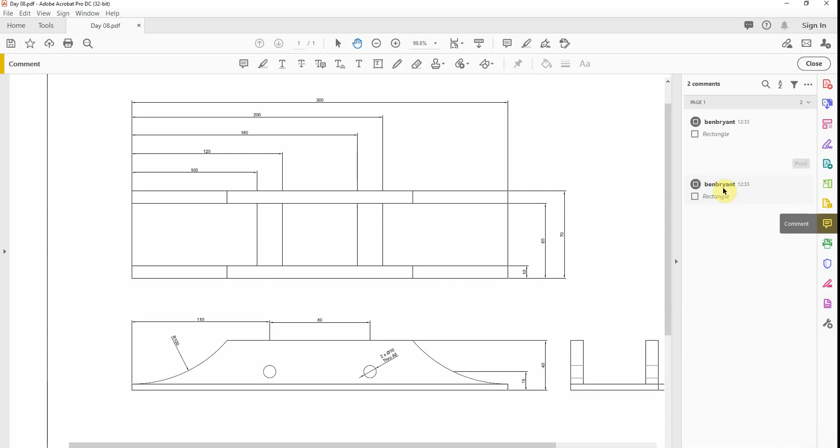So if you watched the earlier video, you know I've split this into 3 parts. This part is the top view, this part here is the frontal view, and the last part on the right is the right hand side view.

So how would you start something like this in AutoCAD? Well, it's the same as always. You need to pick a particular component you want to reference from and start from, so you could use this bottom corner here, and you're going to start to plan your construction, your build up around the features. So I'm going to show you sort of a really cool way of doing it.

So the first thing I need to do is pick this left hand edge, and I know that my furthest component is 300mm away, and from the baseline here, this first view, the top view is 40, so that's the first lines I'm going to put in on AutoCAD.

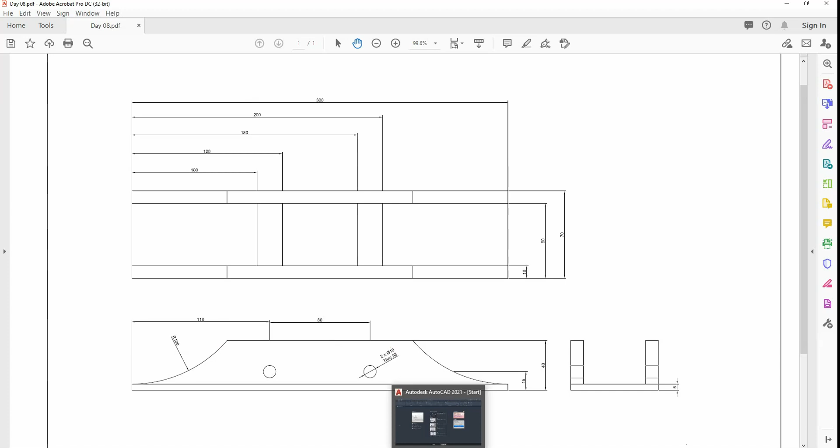I'm going to start my drawing using my template. Just going to close my properties window down because I don't need it for this kind of section, and in the construction view I'm going to draw an X line from my center point. So one way vertical, one way horizontal. I'm going to offset the vertical line 300, that'll give me then the width. Escape space to reload the command, 40 to get my height for the first particular component.

Now you can choose to then maybe set up the next component, or you can start to work on these features. So what I'm going to do is offset probably 50mm gap between top and bottom, and 50mm from left and right. So I'm just going to go in, offset 50mm, and then we go 50mm from this line across, 50mm from that line up. And what I tend to do sometimes is colour them differently if you've got to see a red line that's going on, but at this stage it's still quite easy for me to spot. Then I've got 70, and this gap will also be 70, so I can now do offset 70 on both features.

So this zone here, okay, is my top zone. This zone here is my frontal zone. That little zone there is my right zone, and what I'm going to start to do is just use these zones to build up my shape.

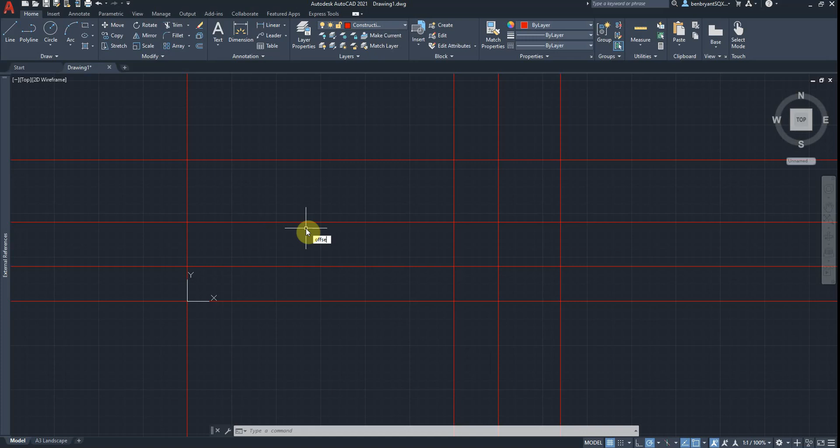So people always ask where's the best place to start, and it kind of varies, but you know, you've got 100, 120, 180, 200, so I could start by putting in those set dimensions from my offset. So offset 100, like so, escape space 120, same point, escape space 180, and finally 200. Okay, that's put my little slots in which are coming down here.

I know that I've got a 10mm shoulder here and a 10mm shoulder there, so simply I'm just going to offset 10, and I'm going to come 10 up, and I'm going to come 10 down. That's basically like my outer shape sort of done.

So I'm going to draw a rectangle, obviously in the drawing layer. Use my rectangle tool. Okay, now I can use my line tool, like so, to cover all these points. Actually, I think my rectangle is slightly too wide by the looks of it.

So what I have actually done, stupidly, I've taken it too far, so I'm just going to drop it back a little bit, which is why it's good to have these stretch tools. So there's my first shape, so it should be 300. I'm just going to do a quick measurement, because I've already measured it wrong once. There we go, 300, so that's perfect. Just going to remove that one out of my way. Okay, so that's my first shape.

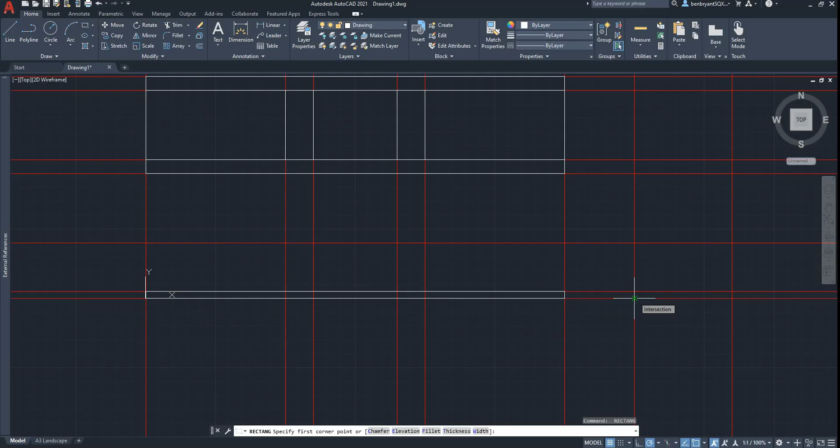Now I can come along and get my second shape. So again, still got to put that 10mm little feature in, which from the side profile is 5, so I'm going to do offset 5 from the bottom up, like so. And now what I can do is put my first little feature in, there to there, and on that profile as well. It's like the base profile before the top comes on, so I've got my right hand edge as well.

So I've got all these components. Now I need to work out what my centre holes are, so 150 and 80. I'm going to colour these ones a bit differently, colour this one into my vision layer, and now I'm going to offset this 150, so the blue line will sit, and then 80 from that point, which will cover the middle part, like so.

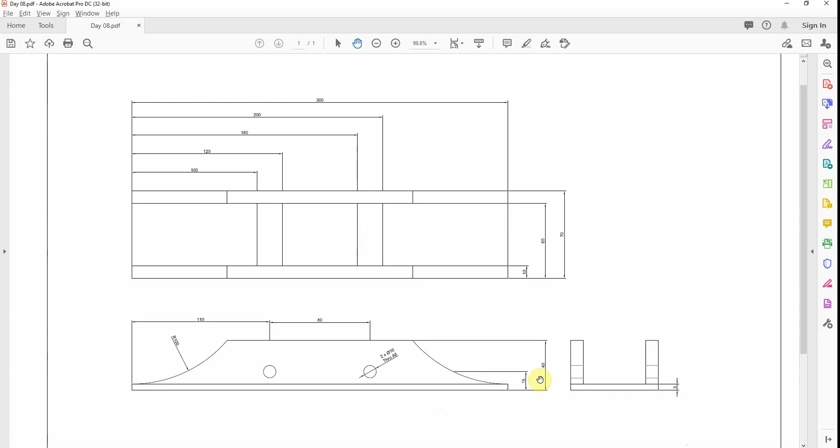Now I'm going to change that back to my construction layer, because it specifies the edge, which then will apply those holes, which are 15mm above. So offset 15, like so, change that to vision, and we're all done.

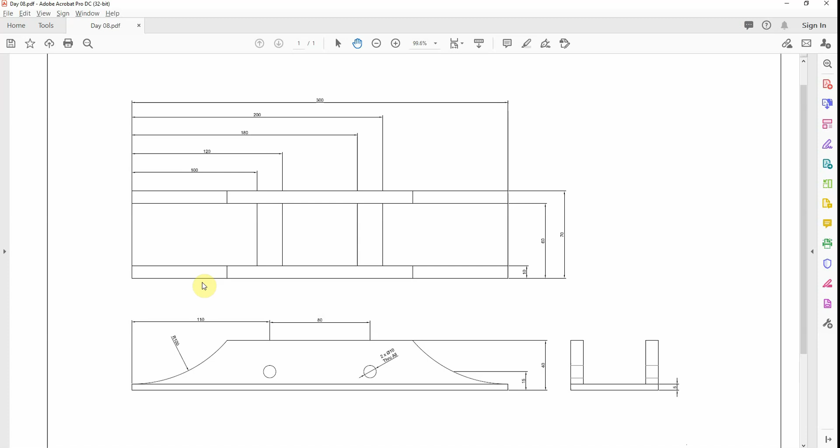So lastly, it's putting in this R100. Now, you know it's 40 up, but you don't know where from and to, so what we're going to have to do is draw another line at the 40 line.

So now we're going to put in our angles. Obviously we know it's R100, so I'm going to draw a line up from here, 100. Give me that point, and put that in my vision, like so. And all I'm going to do is put a centre radius, 100.

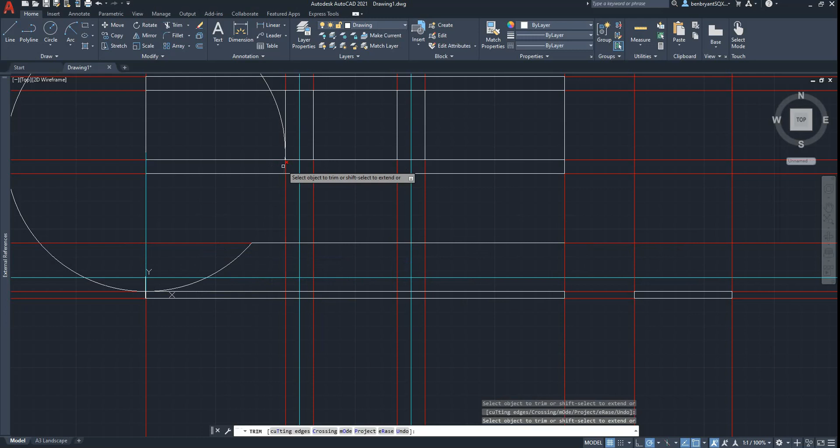Okay, and where my line - it seems to snap down there, it's a bit strange. Put a line across, trim out the stuff I don't want. Just make sure you do get rid of all of it. I probably should have turned off the other parts of the drawing first, but we're in this bit now.

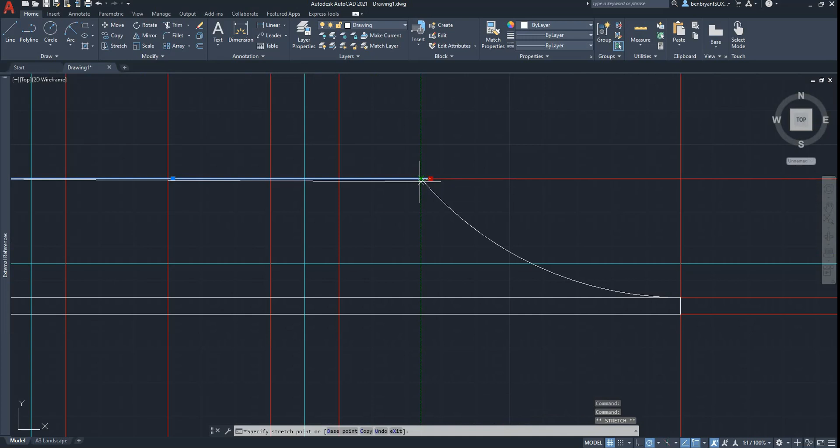There we go, so that's our first bit. Then what you could do is just do like a mirror. So you find the centre of our object, so we find offset 150 on that line, and we do a mirror. Select that object, rotate it around this object, keep the original, and then we just do a quick snap back, like so. So that's that element in.

And what we can now do is we can measure point to point, so it's 76. So we could now offset 75.99. There we go.

And then there we go. Now we come in and draw our lines across our top section, like so. So then that's that element done there.

Last element is we've got to just transfer this across, and it's 10mm wide. So offset 10 on that one. It's just going to be like building another little rectangle, and then the slots, or the holes, will transfer through. So we can do two little rectangles.

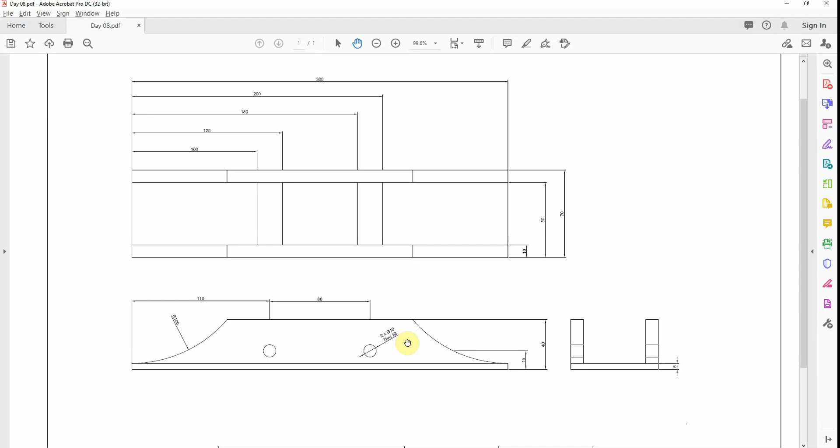Like so. Last thing to do is just put in our circles, which is two lots of radius 10, diameter 10. Like so, and just offset now 5 either side of that line.

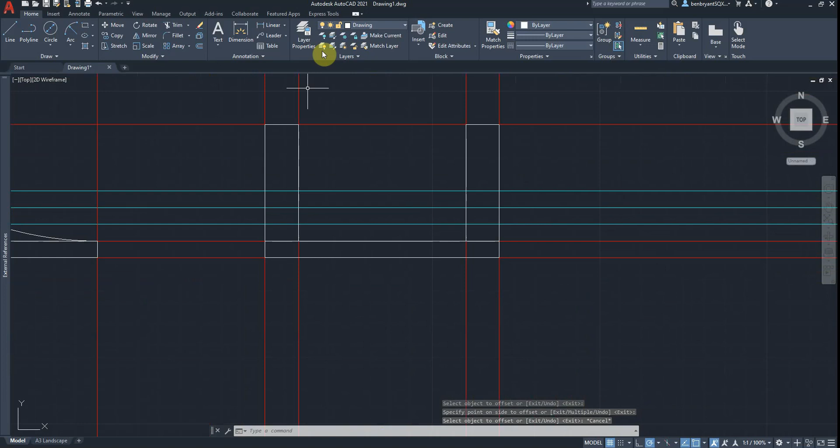And then what we can now do is put some hidden detail in so that hole goes through. So I'm just going to do a quick another layer, call it hidden. Oh, double D, can't spell. So rename hidden. I'm going to change my line to a hidden line, so it's going to load

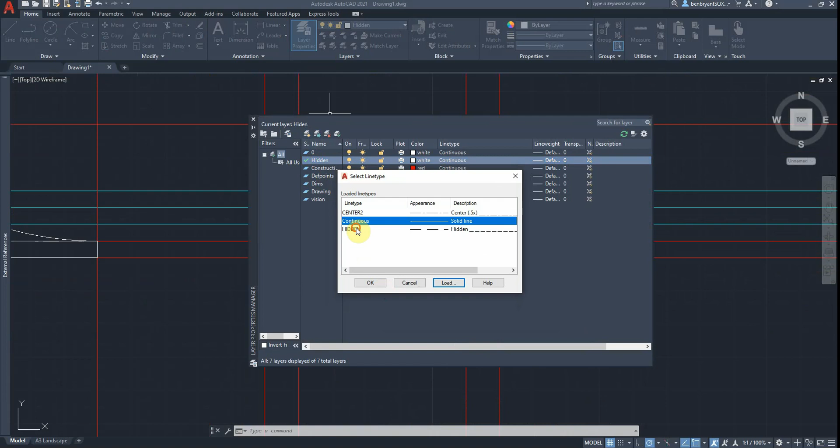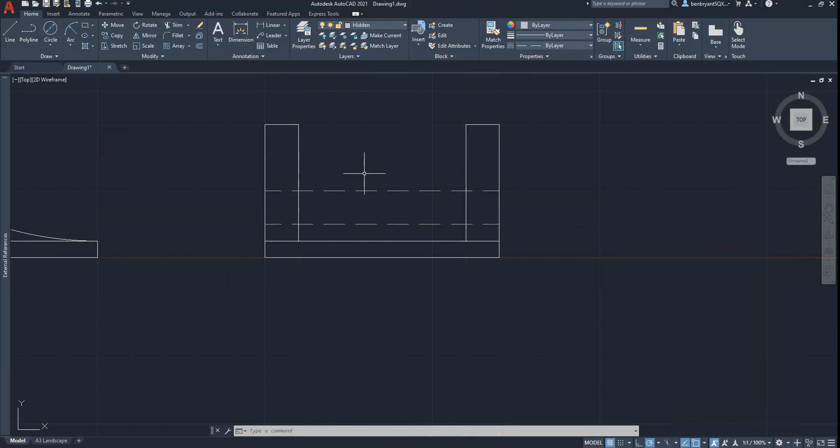H for hidden, load in hidden. I'll go down, change it to a bit of grey colour, just so it's a little bit different. Okay, so done that. I'm going to turn off my vision layer, turn off my construction layer, now I can do a trim. Okay, like so, and that's perfectly fine.

And that's essentially the first part of our three top, front, side. Now it's just a dimension, so in my dimension layer, I'm going to come along and start to do the required height work.

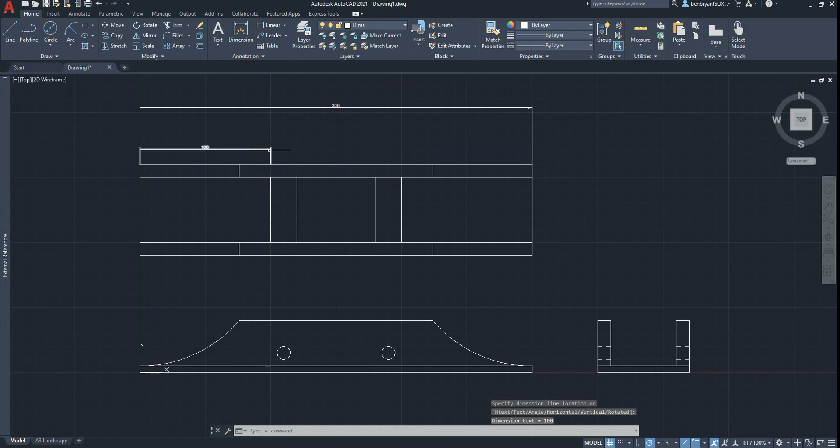So 100, 120, so I'm just keeping it nice and clean all the time. So if you're struggling, like what I am there, and you can't get it right, you could always just turn the construction lines back on.

You could sort of now go, well, the height's 40, 10, it's 10. You can obviously change the dimensions, make it how you want it rather than what the drawing said. It's 300 long, it's 40 high. Could do the 70 on this side rather than 70 above, only measure once.

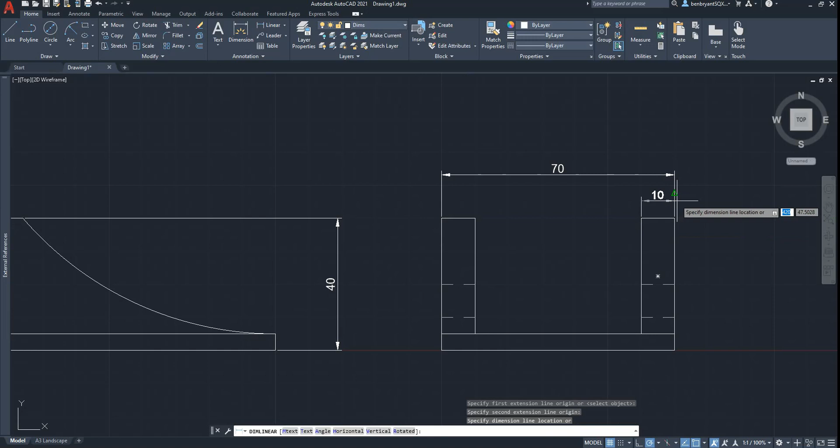Like so, that's 10mm because we had 10 transfers across both. Keep it nice and clean. You might want to say that that part is 50, so it gives you a little bit of aspect that it is the same 70.

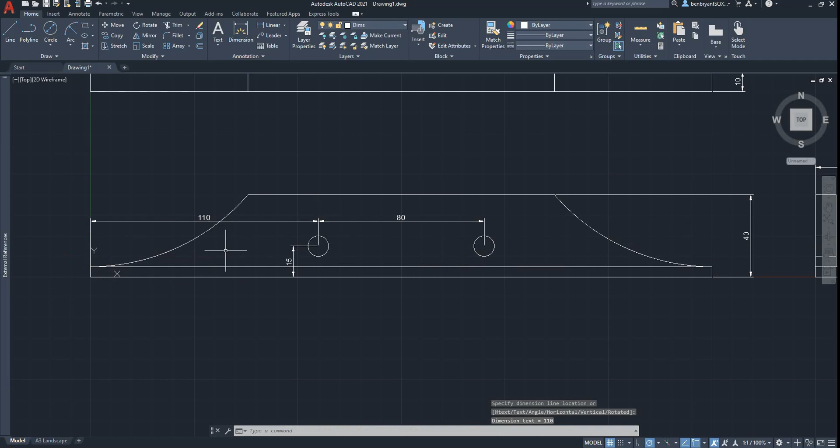You want to come in and say, well, okay, my linear points, 15, got a gap of 80 from the datum. It's 110. You should keep them out of the drawing. This is only like a brief production drawing, it's not a full blown, ready for scale manufacture as such at R100.

Like so. So there's sort of a brief overview, and you come out, format it, and away you go. So that's our first solution to one of our products.